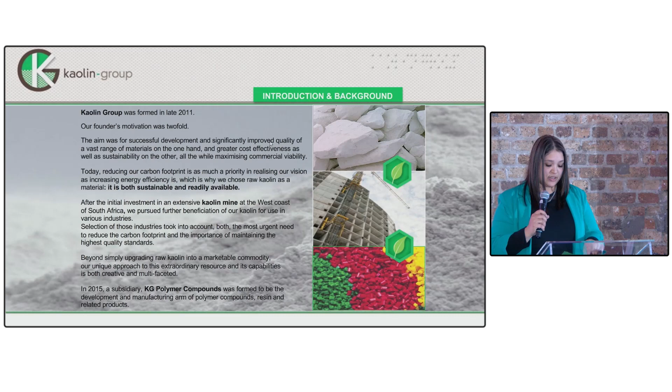After the initial investment in an extensive kaolin mine at the west coast of South Africa, we pursued further beneficiation of our kaolin for use in various industries. This brings excitement as it will benefit our ecosystem, and on the other hand, it's cost effective. So therefore, in 2015, KG Polymer Compounds was formed to add to our developed kaolin in polymer compounds, resins, and related products.

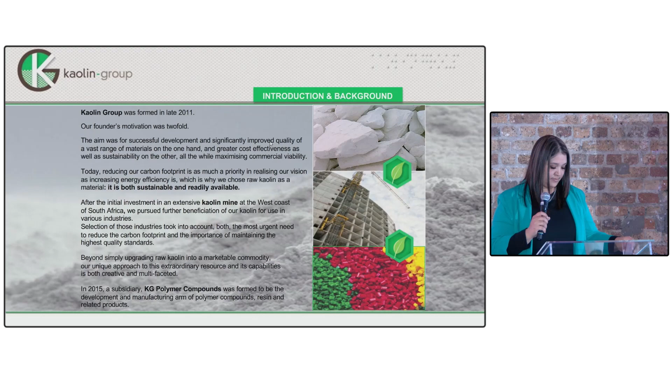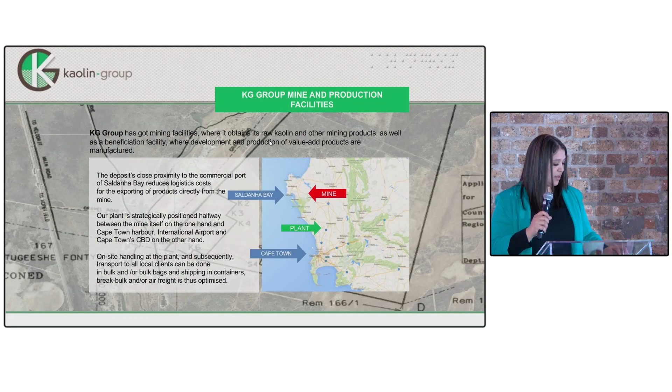So here goes. We faced many challenges finding a way to dry separate raw kaolin. Over the years, Kaolin can now proudly say that we have successfully invented and patented a dry separation method for all raw kaolin sources. You see, the traditional method of wet separation would never have worked sustainably due to the global droughts and water shortages.

So our dry separation method uses recovered waste heat from the calciner only. Isn't that amazing? This is very important for our environment and the creation of cost effectiveness of metakaolin so that it can be commercially viable for our cement industry and low carbon concretes.

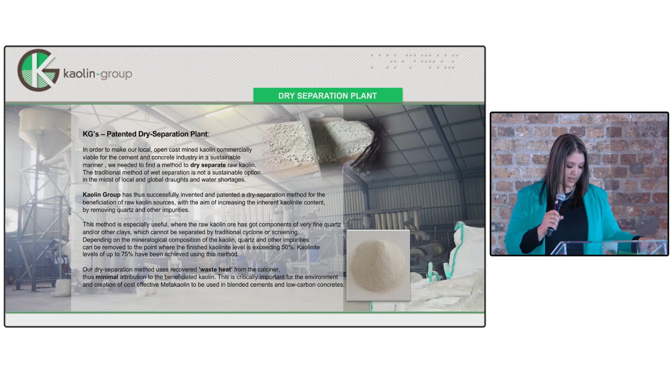So LC2 is a sustainable manufactured low carbon footprint SCM for use in concrete, mortars, screeds, plasters, etc. Note that it can replace fly ash, slag, and silica fume. It is blended with metakaolin and uncalcined limestone powder. This is a great opportunity for the Western Cape especially, as it can be supplied at your doorstep. Thank you so much.

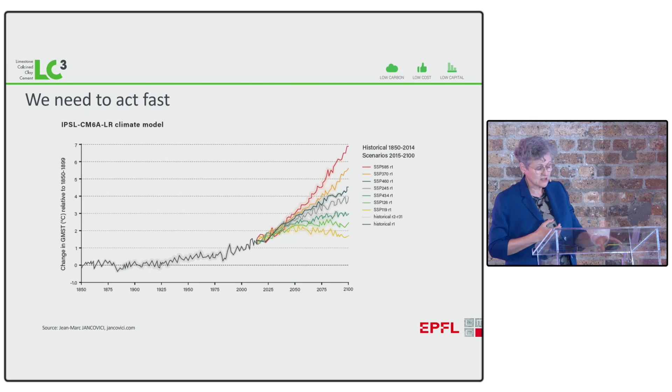This graph here shows you various climate change scenarios based on how quickly we can reduce CO2. You basically see if we do absolutely nothing, we have a temperature rise of 7 degrees, which most people agree would be catastrophic. We may hardly have a human race existing at the end of the century if we go down that route. Then there are various scenarios here, and the one at the bottom is the one we talk a lot about now, because this is going to net zero by 2050. So it's no good having some wonder solution that might come along in 2070, because 2050 is this key date when we can start to turn things around and reverse this global warming.

That's also why we can't use, there's a big debate about timber, to what extent it's carbon neutral. I don't want to get into that debate, because the simple truth about timber is we haven't got anywhere near enough to make any impact on this use of concrete. It's been estimated if we wanted to replace just a quarter of concrete with timber, we would have to plant new sustainable forest 1.5 times the size of India.

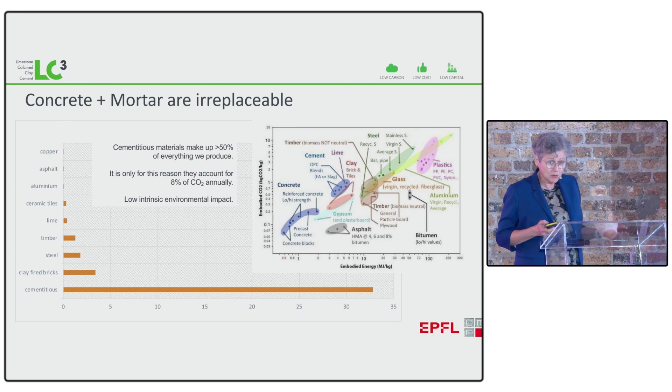Now, of course, we should do that anyway, but we still have to wait a long time for it to grow and be able to harvest it for timber.

When you look at benchmarking on the whole building level, this is a very interesting report published last year. You see that when you put everything together and calculate the CO2 per square meter of the building, how much CO2 for all the materials compared to the square meter of usable space.

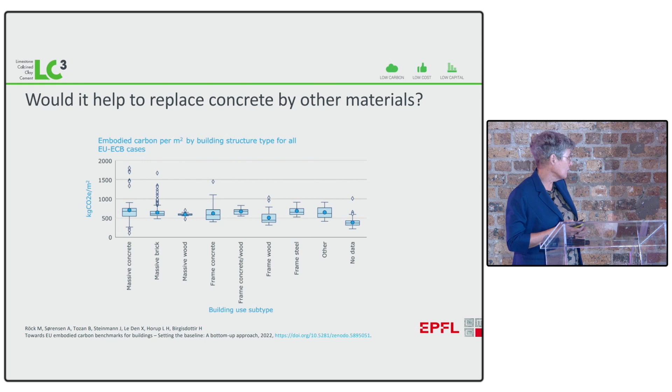What we see very clearly here is there's not a lot of difference between what materials we use, but particularly in the concrete column, there's a very large dispersion. In this study, the building with the lowest CO2 per square meter was in concrete, but also the highest. Clearly, if we can move all the high ones down to the low ones, we're going to have much more impact than imagining we can switch to wood or something like that.

But in the next 30 years, that's going to change again. China's going to go down, and that's not surprising, because today they use more than 3 times as much cement per capita as the average in the rest of the world. We're going to see other developing regions, particularly Africa where we are today, become the important regions.

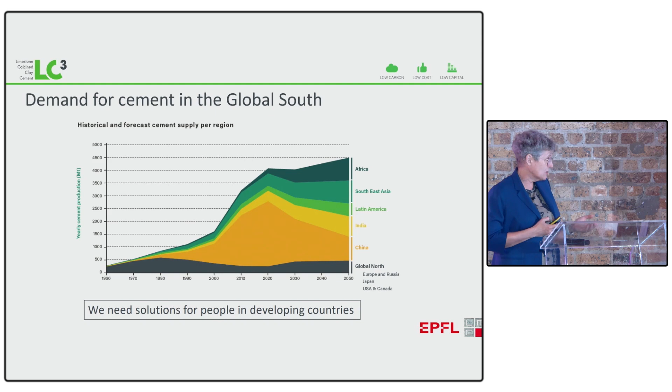So if we want to have an impact on things before they happen, we have to work in these developing regions. Now, there's no miracle solutions, but there are very good possibilities.

This is a report we wrote for the European Climate Foundation in 2017, where we said, look, if you put the whole chain together—reduce the CO2 from clinker production, reduce the clinker in cement, which is what we're going to talk about today, then reduce the cement in the concrete—and you've got to keep going, reduce the concrete in the buildings, which is often when you can save the most. We could probably reduce emissions by the order of 80%.

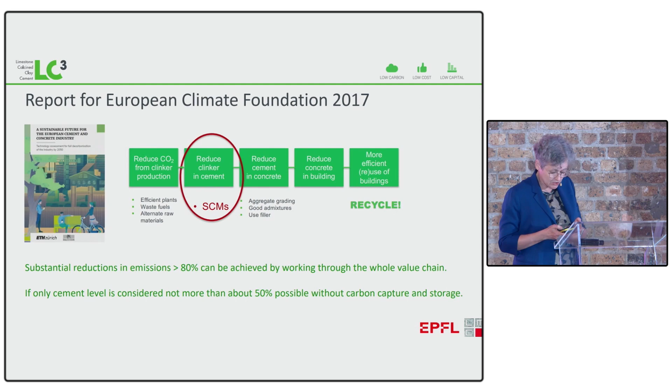And I'm very happy to see this paper where Mark Alexander is a co-author, which emerged a few weeks ago, where they made a much more detailed calculation of all these different levers, and came up with the possibility of reducing 76% of CO2 emissions. That's a great number. It means there's an awful lot we can do without imagining these pie-in-the-sky solutions.

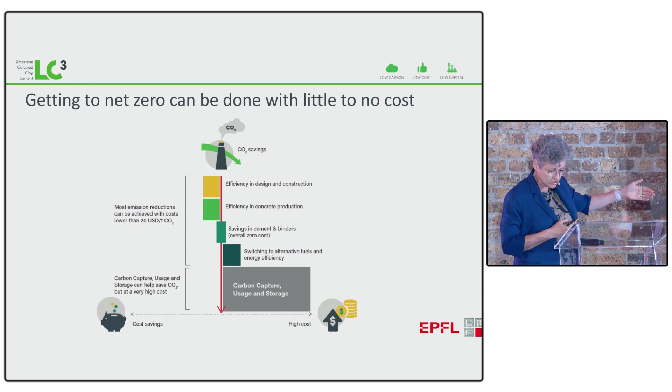The question is relative costs, because all these things—like efficiency of using concrete in construction, the efficiency of concrete production—can also often save a lot of money.

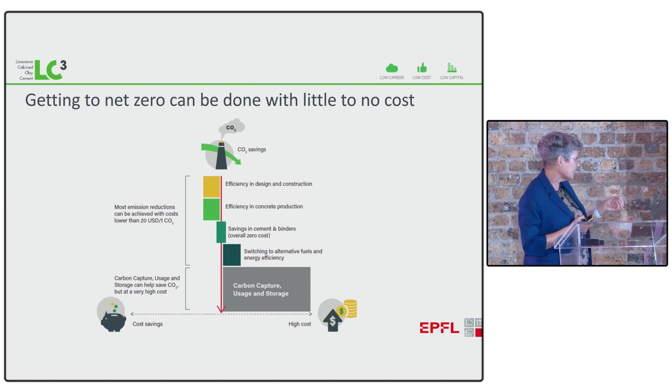At the end of the day, what do you do with that remaining 20% or 24%? Well, you've got to go to something like carbon capture and storage, but that's where it becomes really challenging, because that's where the cost really goes off the scale.

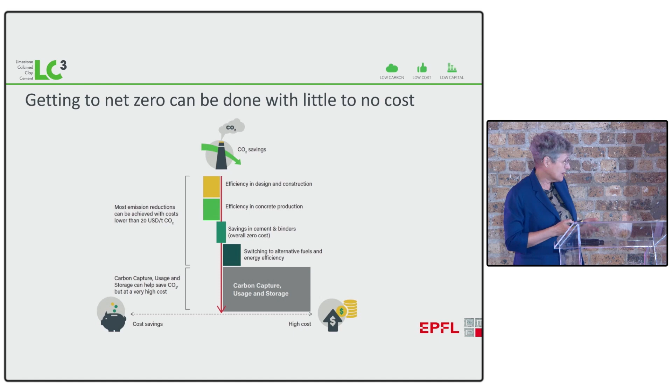While I think we're going to see carbon capture and storage sites coming online in North America, Europe, even China, I think it's going to be a lot more challenging in Africa. So we really need to maximize these things at the top before we resort to carbon capture and storage.

Now, I think most people know that only a minority of CO2 emissions are coming from fuel. The major part of emissions are coming from the breakdown of calcium carbonate. And, as I've said repeatedly, there's no silver bullet—we can't really make clinker in a different way because of the resources available on Earth.

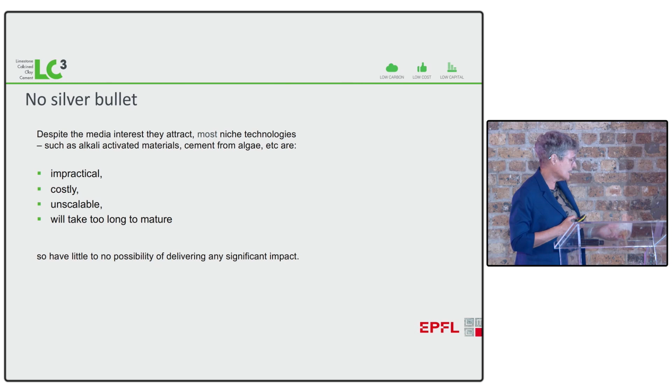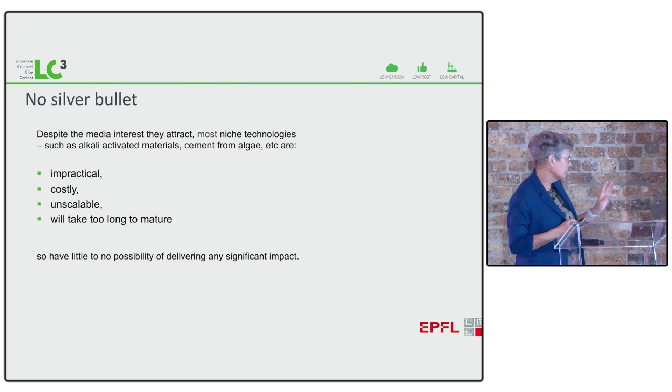We don't get hydraulic materials. There's a lot of media hype about this, but if you really analyze it, the solutions are impractical, costly, unscalable, or will take way too long to mature. So, if you want me to go into detail of anything you've heard about, I'm very happy to do that, but believe me, they are not going to work.

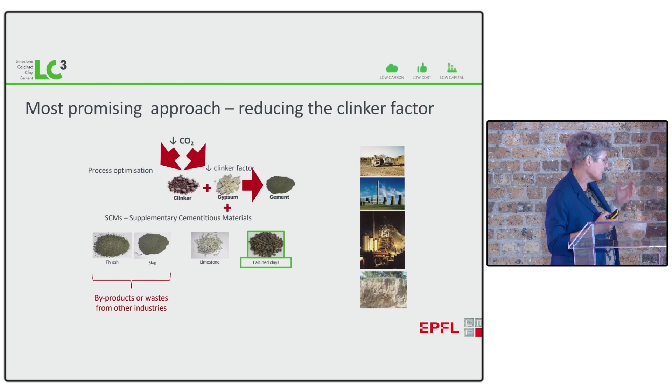But what does work is this use of blended cements—substituting part of the Portland-based clinker with other materials. This has been around quite a while. We've been using for several decades these substitute materials like fly ash, slag, fine limestone, and now calcined clays.

And that's why calcined clays are interesting, because if we look at the availability of these traditional SCMs, we see the amount of slag and fly ash available worldwide today is only about 15% of cement production. Now, of course, that varies locally. In Johannesburg they've got lots of mounds of fly ash, but in other parts of the world, even down here on the Cape, you've basically got to ship this fly ash all the way down here. And slag is an even worse situation, because worldwide we have about 8% of slag compared to cement demand, and nearly all that slag's used. So if you say, well, I've got to have high slag in my project, you just take it away from another project, and the net result is no further reduction in CO2.

So where else can we go? This is where calcined clay comes in, because it's really the only thing available in the enormous quantities we really need to make a difference. This led us to what we call the LC3 project, where we realized not only were these calcined clays massively abundant, but we could get a synergistic reaction with limestone. Limestone's also super abundant, often at the cement plant, and we could then go to very high levels of substitution.

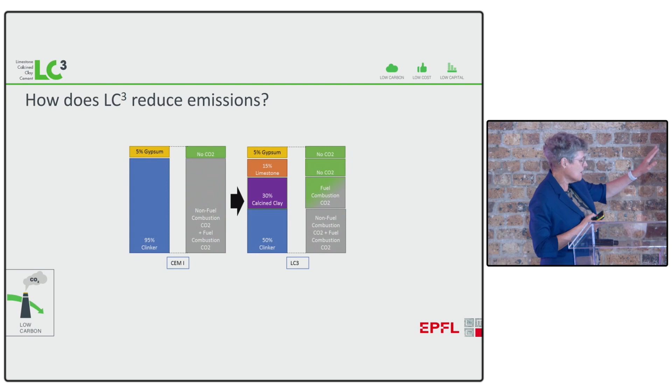So what is LC3? LC3 is this family of materials. We've developed it with a landscape of partners in Switzerland, India, now Kenya. And basically what we do is take about half the clinker - but we can even substitute larger amounts now - and we replace half of that CO2 emitting clinker with this combination of calcined clay and limestone and gypsum. I'm going to come back to the gypsum later because that's a quite important point.

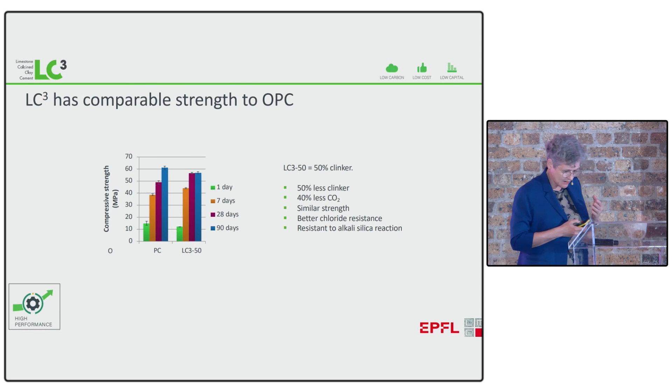With this combination, which we call LC3-50, you can see we can get comparable strength to the reference Portland cement, and we can start to get that strength as early as 7 days, and even at 3 days, even at 1 day, the strength is nearly the same as the reference.

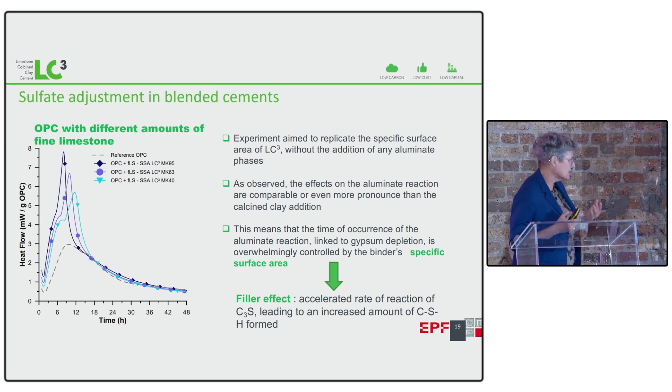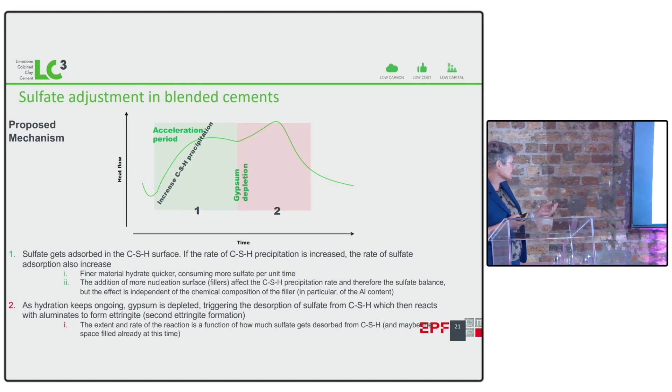It's really more to do with the surface area of the addition you make. The surface area speeds up the reaction of the C3S, and during that initial reaction we get sulfate adsorbed on the CSH, and then that sulfate's later released. So the faster you're reacting your C3S, the more sulfate is adsorbed, and you have to compensate for that. There are some very detailed publications that came out in the last few years that explain that in detail. But you can adjust this quite easily by looking at this development of heat rate. What you need is to have that sort of pointed alumina peak occurring after the silicate peak.

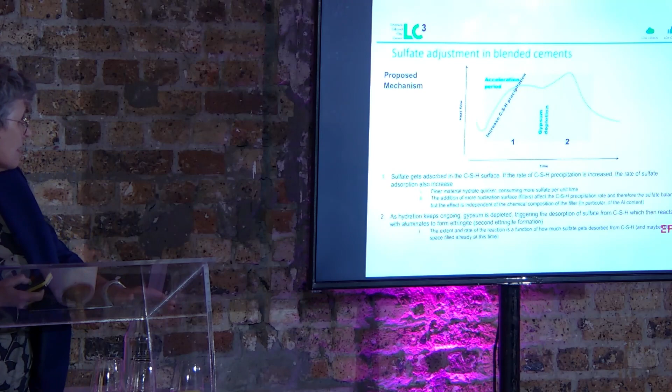Now, here I'm coming back to LC2, because so far I've been talking about LC3, and LC3 is what happens when you mix all these ingredients together at the cement plant and you just use that as the binder to make concrete. Now, in several parts of the world - North America, UK, South Africa are notable ones - the practice has been not to have blended cements where everything's blended together at the cement plant, but to add the additions like slag or fly ash at the concrete level. And you can do that. It's really exactly the same because at the end of the day, you end up with the same mixture in the concrete. And that's what we call LC2.

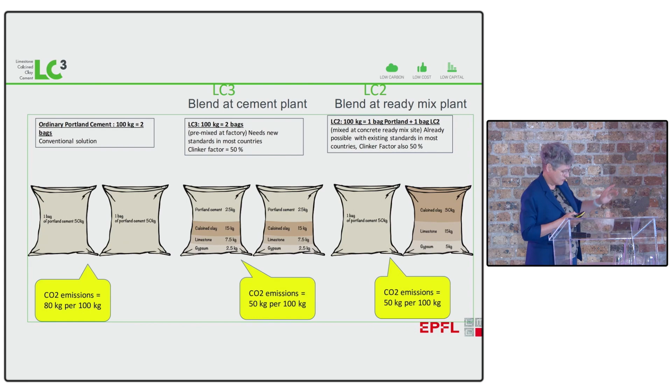So LC2 stands for limestone calcined clay, and the bit of gypsum, as I just explained, and this is what Kaolin Group are now producing here in South Africa. And that's just another way of showing the same information. Either you put everything together in the same bag, or you have one bag of OPC and you have another bag of the calcined clay with the gypsum and the limestone.

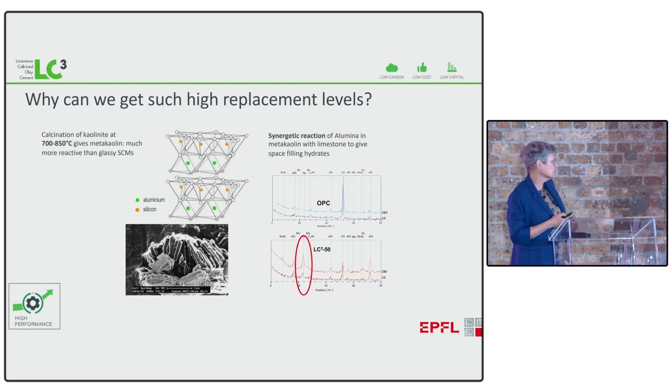Now, the essential point is, why can we get such high levels of replacement? It's all to do with the presence of kaolin. Kaolin has this atomistic structure, where we have one layer of alumina, one layer of silica. The silica can react in the classic pozzolanic reaction, but the alumina also reacts with the limestone, and this is where you get this synergetic reaction, producing those peaks I've circled in red, which are mono and hemicarboaluminate. They're already present in limestone cement, so they're not something new. We know exactly how they behave, but we produce more of them in LC2 or an LC3 mix.

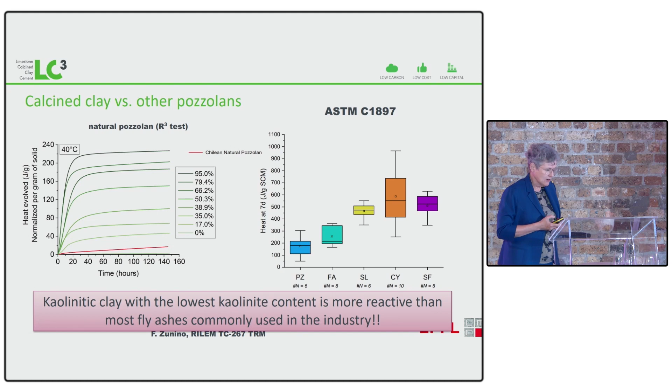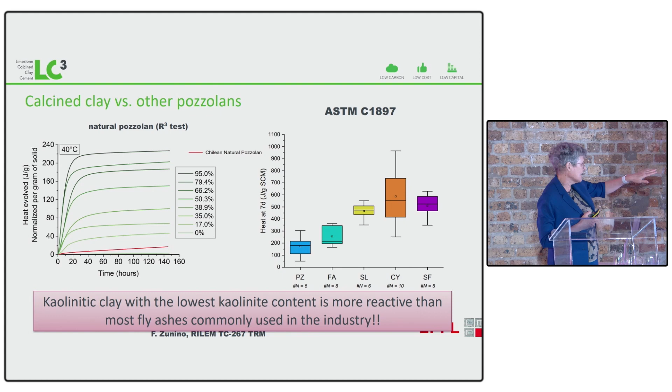You can look at the reactivity of these different SCMs. We spent a lot of time developing this, what's now a standard ASTM C1897, where we can compare the reactivity of different SCMs. You can see the clays, which are in orange here, are very comparable with slag and with silica fume, but of course the amount of silica fume we've got available is really minuscule. These three, slag, calcined clay, and silica fume, are much, much more reactive than fly ash or natural pozzolans. The fact they're more reactive will mean you can go to higher levels of substitution, and higher levels of substitution means you can save more CO2.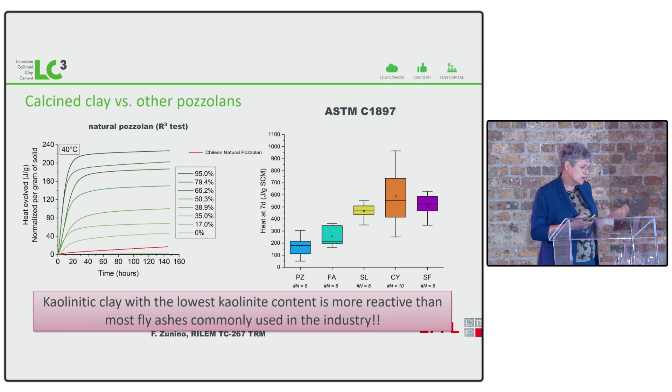And why does this save CO2? Well, here's a detailed analysis of the energetics for producing calcined clay. These are figures taken from a real project. They're going to be slightly different in all the different projects, but here in this version you see that you've got emissions that are 4 times less than clinker. So for every bit of clinker you take out of your cement or your concrete, you've got 4 times less emission, and then you've also got the limestone on top, which has got effectively 0 emissions.

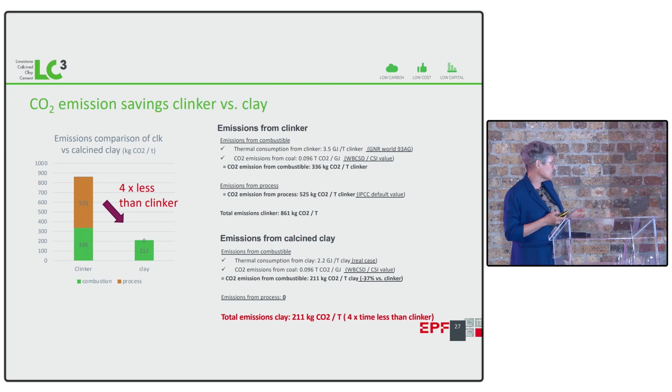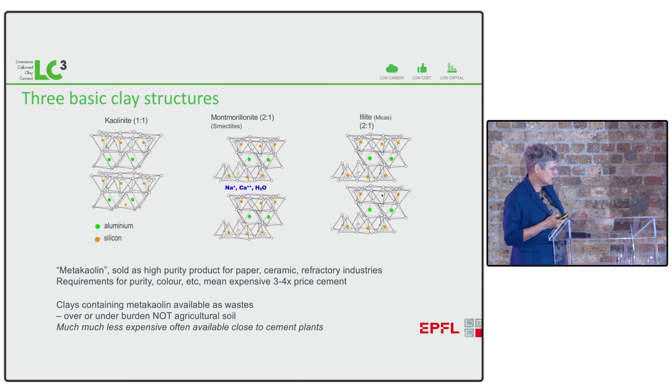So the potential question is, what kind of clay is suitable? Of course we need this mineral kaolin, as I've already explained, but we don't need high purity kaolin. High purity kaolin is used for things like treating papers and ceramics, things like that. We're not competing with that. We're looking at reserves with a fairly low content of kaolin, which are not in competition with these other uses. And we're certainly not talking about agricultural soil. That's the very last thing you want to use. This is an industrial operation. You need a quarry, you need to extract the material professionally.

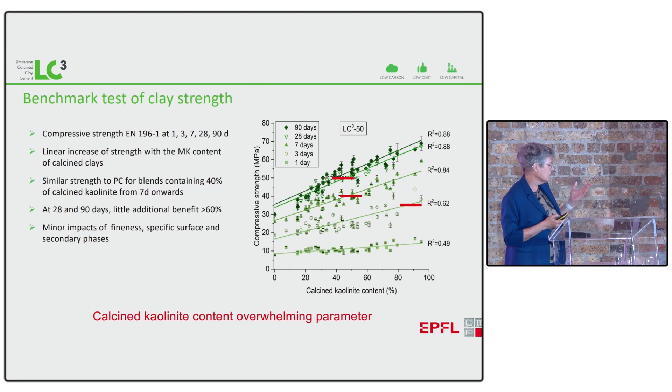We've now studied well over 100 clays from all around the world. You can easily measure the kaolin content by looking at the loss on ignition, and we see that this kaolin content correlates pretty well with the strength. If you look at the top curve for 90 days, you see that in fact it's not completely linear, it kind of plateaus out above about 60%. So you get very little extra benefit for going above 60% kaolin. Those red lines are the strength of the reference plain Portland cement. So you can see at 28 days you only need roughly 30 to 40% kaolin to match the strength of your reference Portland cement.

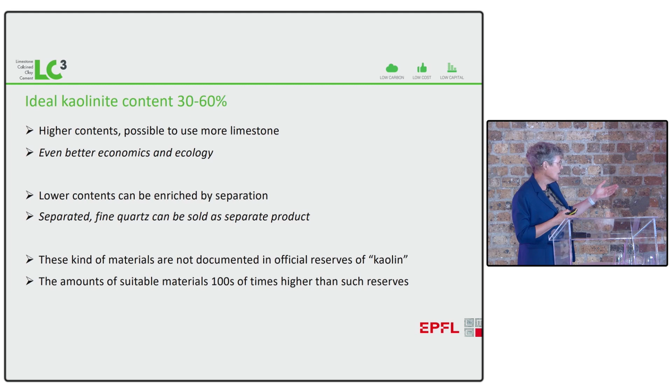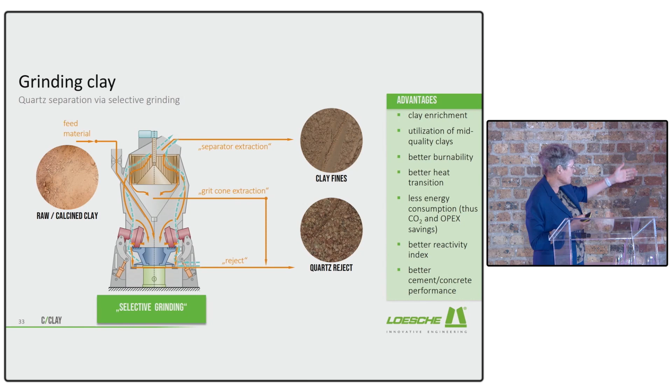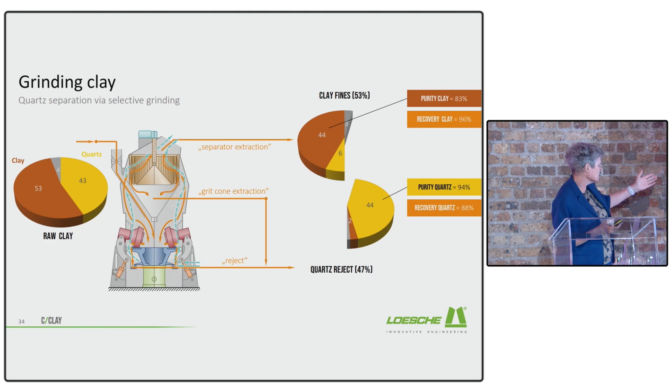So the ideal kaolin content is in this range, 30 to 60%. If you have higher contents, you can blend in more limestone, which gives you even more savings. If you have lower contents, you can enrich it by separation. We know Kaolin Group had developed their own separation route, but just to give you another perspective, these are a couple of slides I got from Loesche, who are doing the separation with the vertical roller mill. They start with this mixture of calcined clay and quartz, and then they can really separate this with a high degree of efficiency. Here in the calcined clay, they end up with about a clay purity of 83%, and the quartz has a purity of about 94%. So you have different methods which are suitable for different clay deposits, and it's clear that what the Kaolin Group are doing here gives a similar outcome.

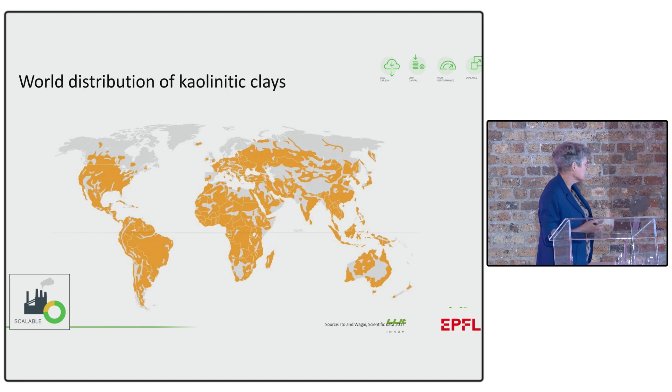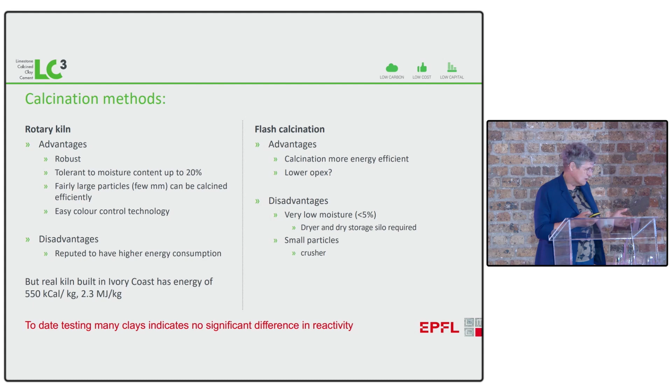The clay you calcine with existing technology, you want to be in this temperature window of 700 to 850 degrees, and you can do this either with a rotary kiln or with flash calcination. There's not really much difference in the reactivity you produce. The rotary kiln tends to be more robust, and you can deal with higher moisture contents.

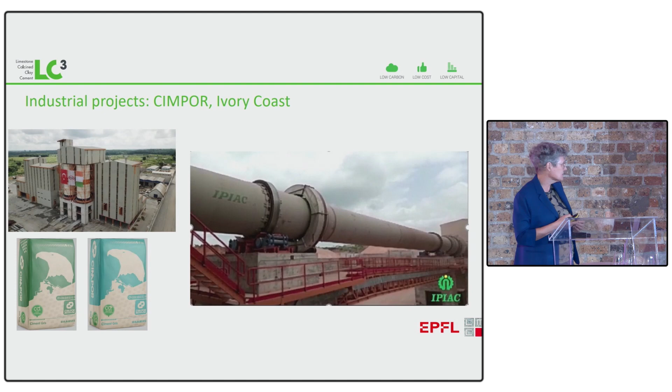What was particularly interesting in this plant is that they could demonstrate it's possible to control the color. Many of you know that cements tend to be reddish, and some people say they don't want red cement. Well, if you don't want red cement, you can make it grey, which is good news. But now it seems more companies are coming around to the idea that it might actually be good to stick with the red color. Other clays have much lower color, particularly this one coming from the Kaolin Group.

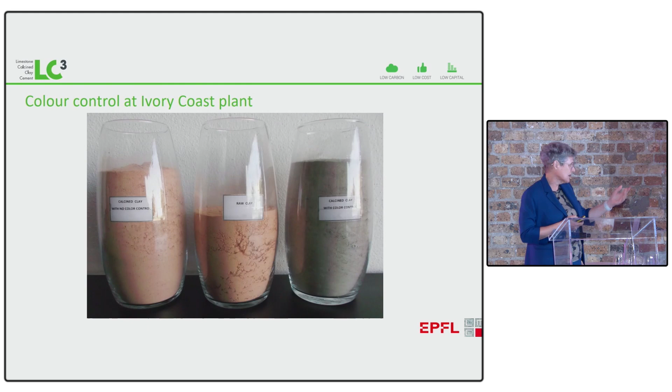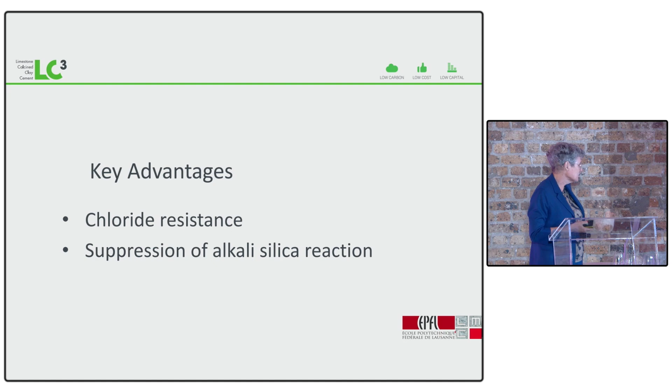So what are the key advantages? Well, the absolute key advantages are resisting chloride ingress and suppressing alkali silica reaction. And those are, of course, the two durability issues you really have here in this part of South Africa.

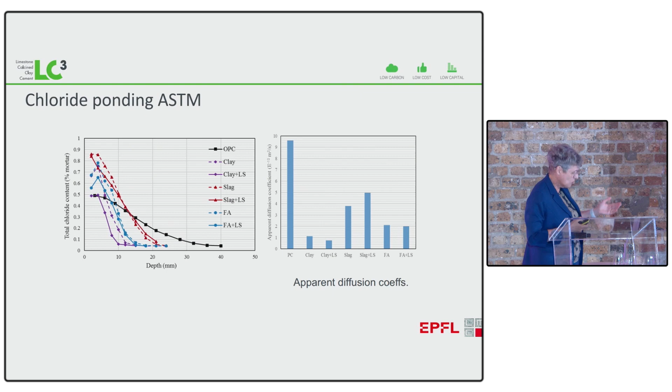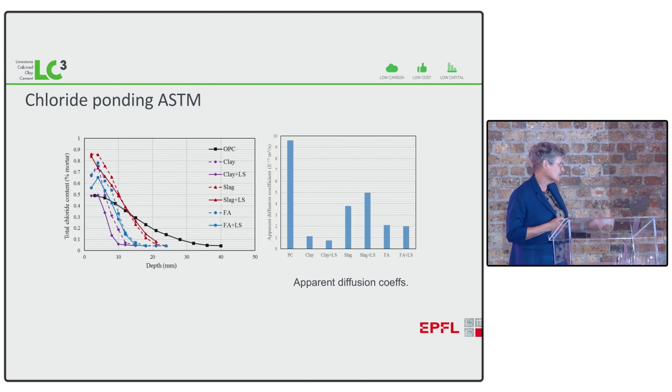This table shows the chloride resistance, where we simply put the cube in a solution of chloride. The black curve is the reference Portland cement. The red ones are the blends with slag, which improve the situation. The blue ones are the blends with fly ash, which improve it again, but the best of all are the purple ones, which are the blends of calcined clay and limestone. So you get better resistance to chloride penetration than with fly ash, better early strength, and very good resistance to alkali silica reaction.

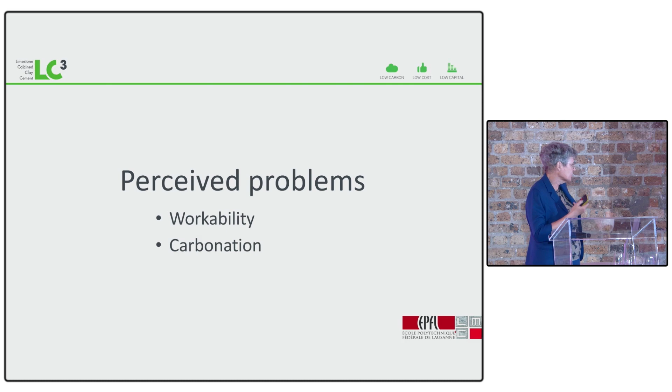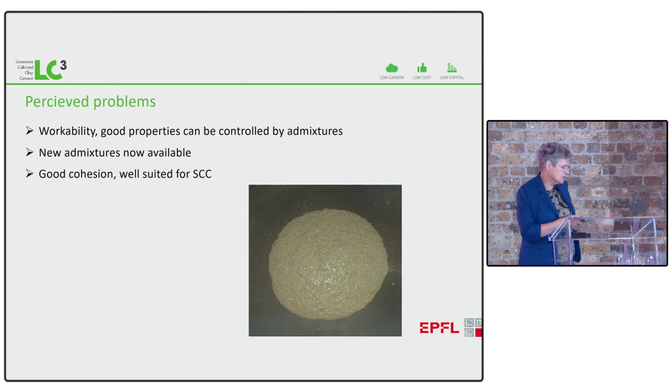Some of the problems people talk about are difficulty with workability because you've got a fine material, and they talk about carbonation. In terms of workability, the really important point is we have superplasticizers that can deal with this. And on the counterpart, we have very good cohesion with these blends, so they're very suitable for self-compacting concrete.

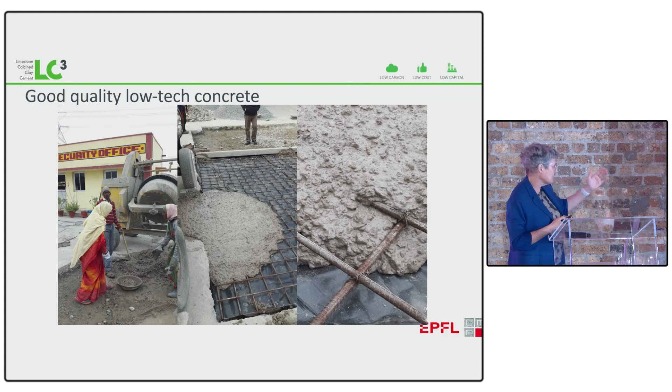This was one of the first projects we did in India. You can see that mixing the concrete is not at all technical, it's just done by volume batching by those people there, in a small mixer. Nevertheless, batch after batch they could obtain this very good cohesive concrete with no bleeding, no separation.

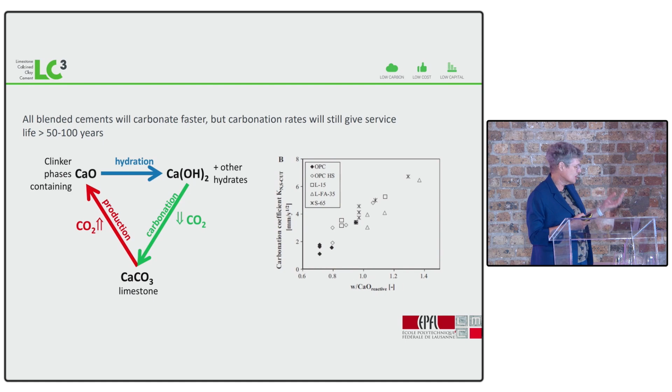In terms of carbonation, well, there's no such thing as a free lunch. The whole point we've been trying to work on is reducing the amount of limestone, which is giving off CO2 in the first place. And that inevitably means there's less capacity to absorb CO2 afterwards. So low carbon materials will carbonate faster because they contain less buffer.

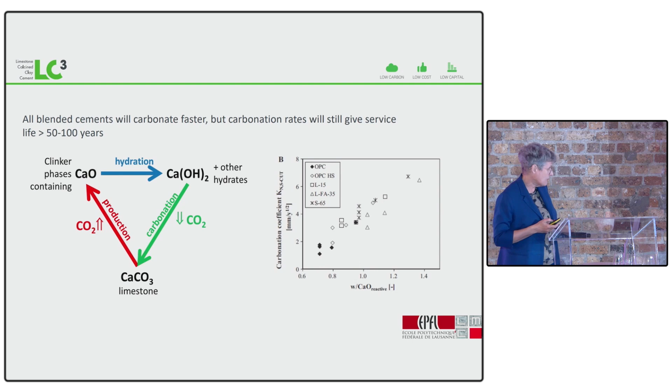Of course, much concrete used in interior situations is going to carbonate, but it's not going to have a reinforcement corrosion problem because it's much too dry. So whether carbonation leads to corrosion of reinforcement is very much a question of moisture content. It's only where you have this alternance between very wet and very dry conditions that you might, and I stress might, have a problem. So maybe a few balconies, but you can make your balcony in a different mix. Why waste all that CO2 in the whole rest of the building?

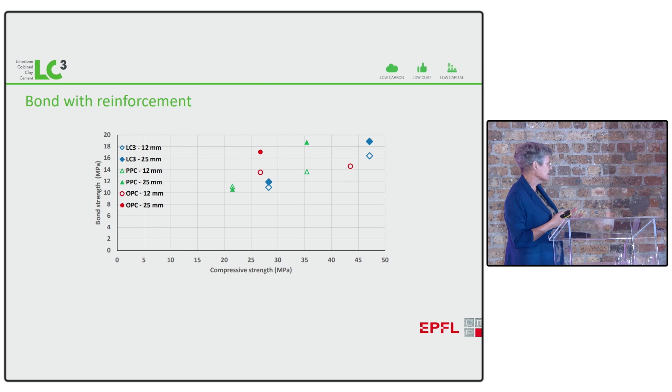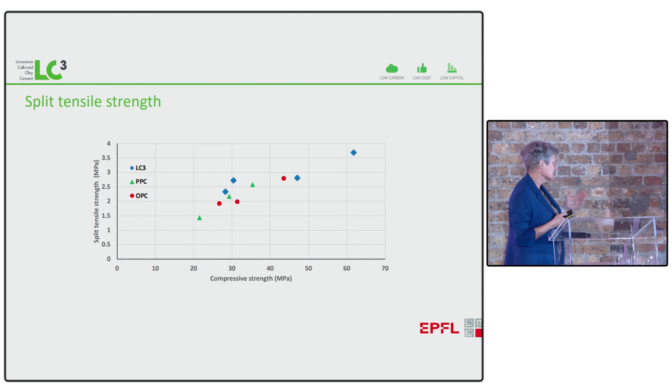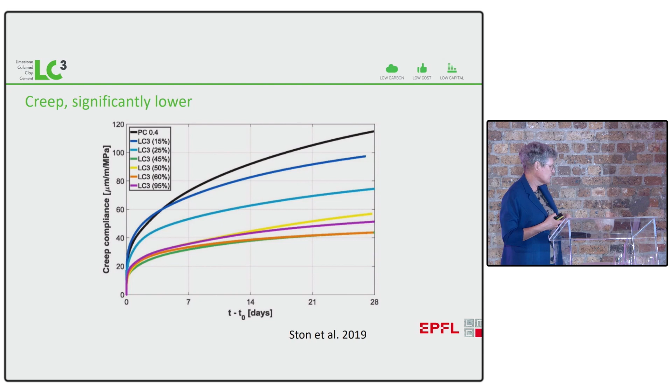The only thing that seems to be different is the creep, and we seem to have a lot lower creep with the LC3 than we do with the other blends. We're actually looking into this further because my colleague, who's a structural engineer designing high-rise buildings, thinks you might

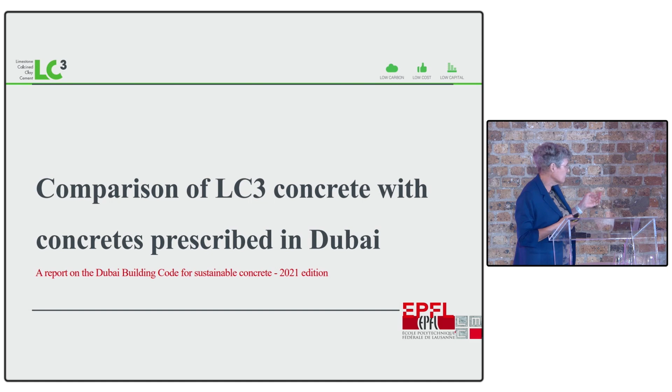be able to make major savings in these kind of buildings because of the lower creep. And just to show that LC3 concrete can be used in all kinds of applications, this is a small study we did where we compared LC3 concrete with the concretes prescribed in Dubai. So in Dubai, because they have a lot of durability issues, they're prescribing concretes containing fairly high amounts of slag

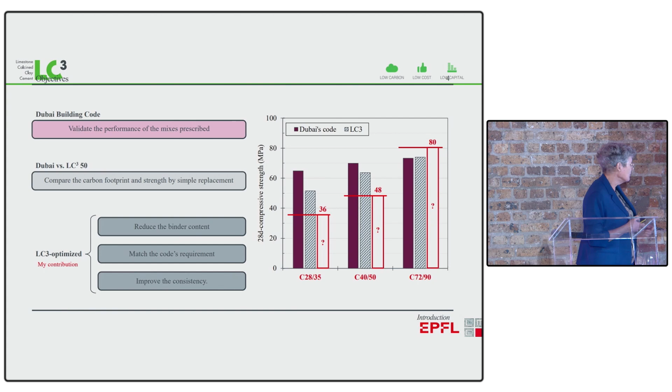and silica fume. This then shows what happens when you take out the binder they put in and you substitute it with LC3. You can actually see that 2 out of these 3 concretes, the 35 MPa and the 50 MPa, are actually massively over-designed.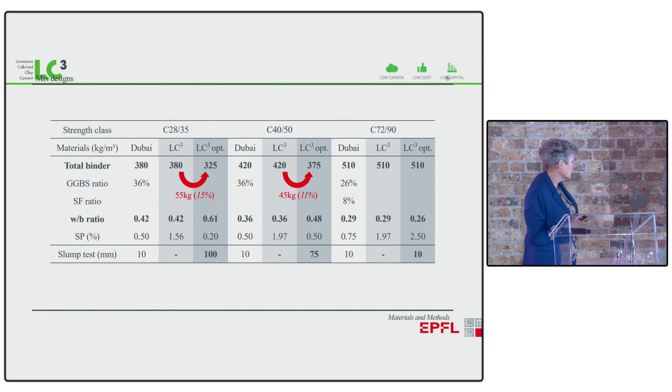They have much higher strength than needed, while the C90 concrete is under-designed. So then we kind of looked at these mixtures again. We always did the life cycle analysis, and we saw what we could do by taking out some of the cement content, playing a little bit with the water-cement ratio, and now we can come up with mixtures.

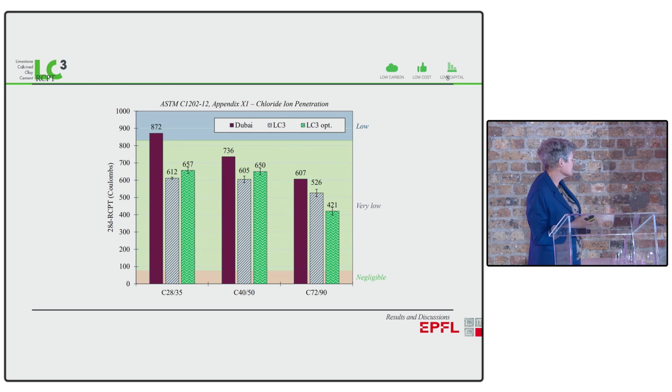That's the chloride mixtures, which you can see that the chloride penetration by this RCPT method is always lower in the LC3, but what's more important here is the compressive strength and the global warming footprint.

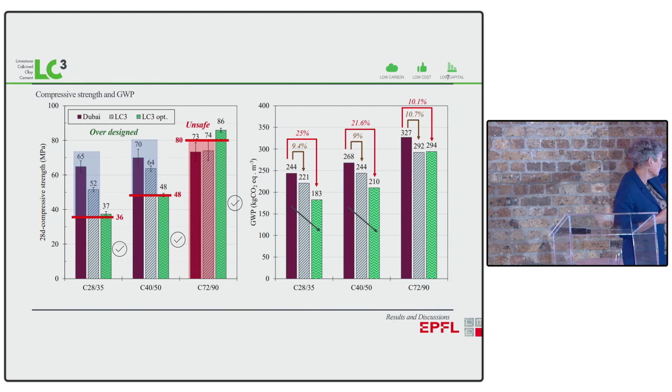So we're now hitting the compressive strengths we need, and in the case of the reference concrete to the LC3 optimized, we can save 25% CO2 for the basic concrete, we can save 21% CO2 for the kind of intermediate concrete, and we can still save 10% of CO2 for the high-strength concrete. And remember, the high-strength concrete they prescribed wasn't actually even meeting the criteria.

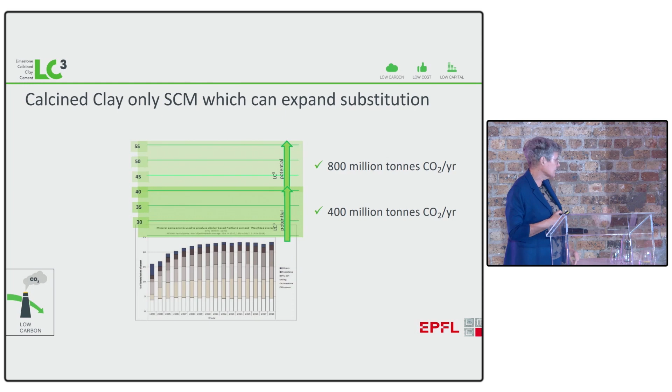So if we put all this together, using calcined clay has a huge potential for lowering CO2 emissions worldwide. This is a simple calculation we made, taking the level of substitution today around the world and saying if we then went to a technically quite easy substitution level of about 40%, we could save another 400 million tons of CO2. And if we think of a perspective on 2050, we can probably do twice as well as that with a bit more effort.

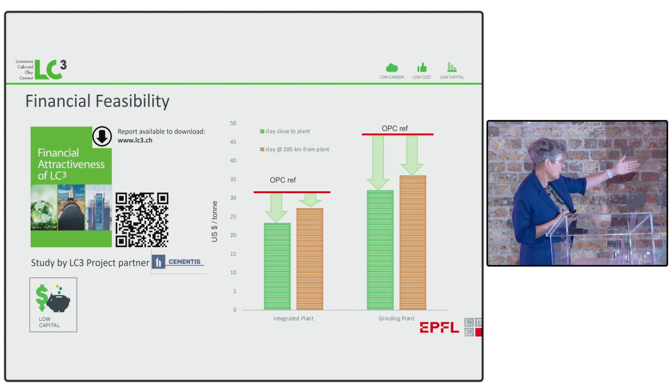And we can save money. So this is the comparative cost of LC3 mixtures compared to an OPC reference. There's a detailed report on that on our website. And in fact, since we calculated these figures a few years ago, the balance in favor of LC3 has really been tipped further because energy prices have gone up, because most of the price of cementitious material is related to the energy you use. Because we've got a lot less energy, we can save on an integrated plant where you're also producing clinker. We can also save in a grinding plant.

And lastly, I just put a few slides. I'm going to go through these quite fast, but Robin De Beer has a copy of these if you want to know more. And this is how we can deal with this in standards based on the UK situation, which closely mirrors what happens in South Africa. And making LC3 is now not a problem because that is in the EN 197 standard.

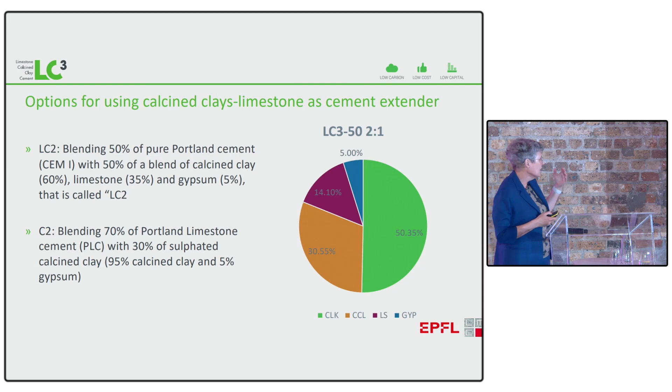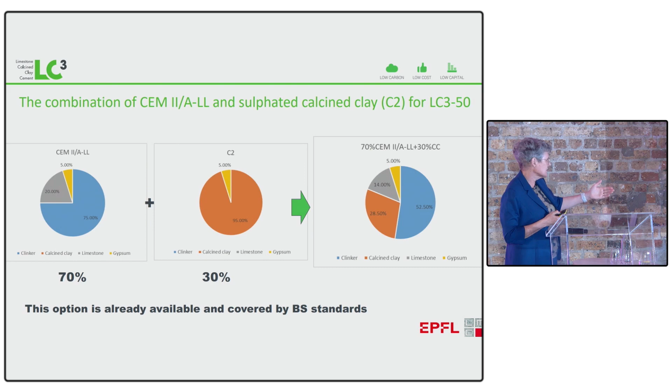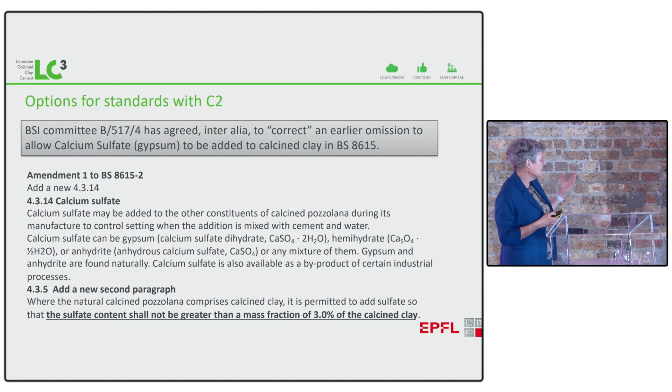When you come to LC2, it's a little bit more complicated. You either can make this LC2 blend or you can make the blend of metakaolin on its own. Each of them has different criteria according to today's standard. If you add them all separately, this is covered by the present British standards. If you want to start adding them together, then it's a little bit more complicated, but there are proposals to the British Standards Institution to deal with this, and they've agreed to correct this, and then options for C2.

Now, why is C2 so interesting? Well, it's particularly interesting in that it's very flexible, so you can increase or decrease the amount of addition depending on your application, and it also has a very long shelf life.

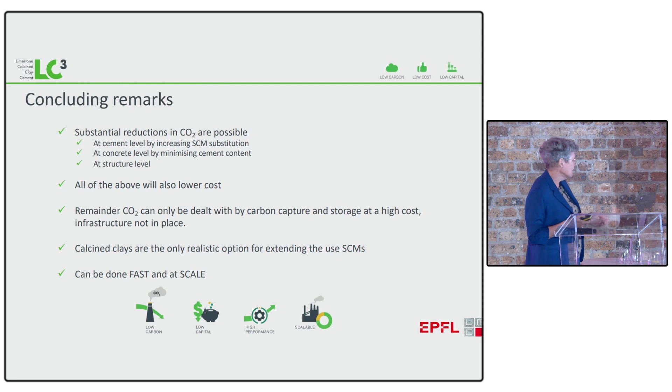So I think I've gone on well long enough, I don't want to bore you to death. I think the main message is that we can make substantial reductions in CO2 just by applying known technology and working through the value chain. We can make reductions at the cement level by increasing the use of SCMs, either at the cement level or when we make the concrete. We can also make reductions at the structural level, which is often forgotten about, and this involves different parts of the industry working together. All of these will actually lower costs.

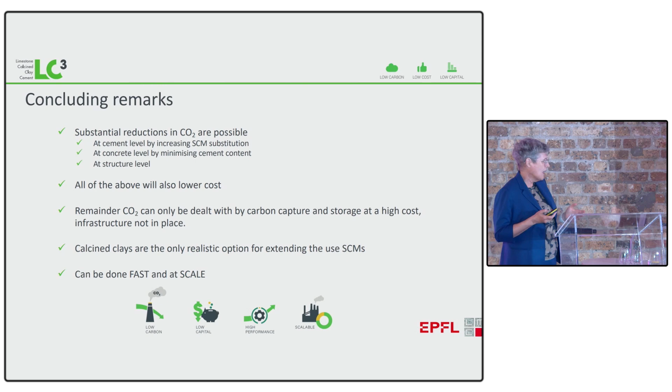We won't be able to get completely to zero this way. We'll have to have some measure of carbon capture and storage, but this is where the price completely changes. So we really want to maximize everything before we have to resort to carbon capture and storage. Calcined clays have this incredible role to play because they're so widely available, and the technology is available now at basically any scale you like.

To try and stimulate the industry to work better at a global level, we formed the Globe Consensus, to encourage measures like benchmarking of CO2 in buildings. You can find more about this on the web or ask me about it.